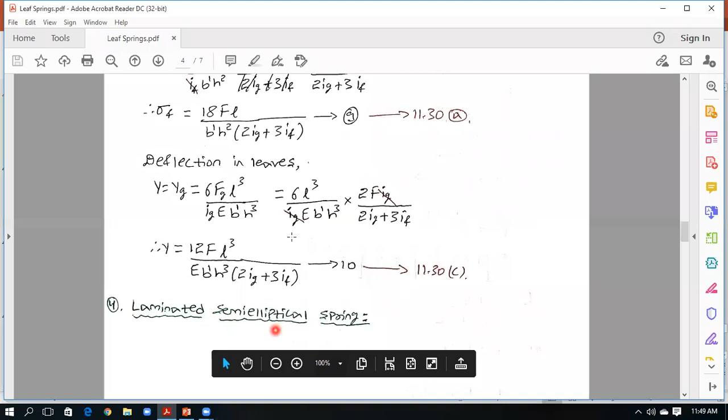In this, when the central bolt, which holds the various leaves together, is tightened, the full length leaf will bend back as shown in the dotted line. As you use the center bolt, that is U bolt shown in the previous figure, the various leaves will tighten and the full length leaf will bend back as shown in dotted, coming in contact with the graduated leaves.

And while doing this, when you use the U bolt and tighten it, an initial stress will be induced in the direction opposite to that of the normal loading. Whatever the normal loading is, the initial stress induced will be opposite in direction.

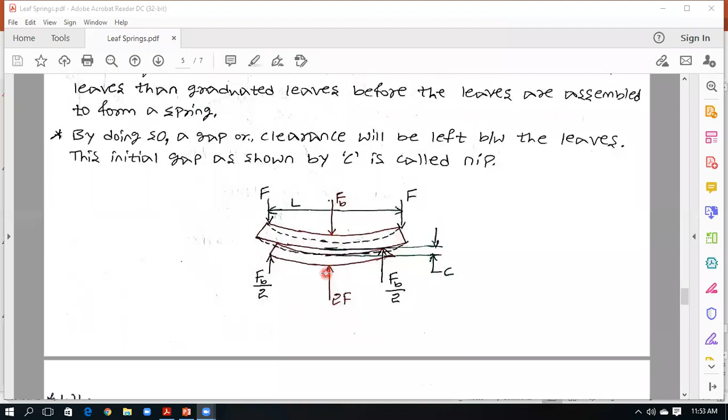When you take the difference in radii of curvature, that is called nipping, and the initial gap to be provided between the two leaves before assembly is given by the formula 11.32a, which you have seen. This is the formula used to calculate that. I hope you have understood this nip or nipping.

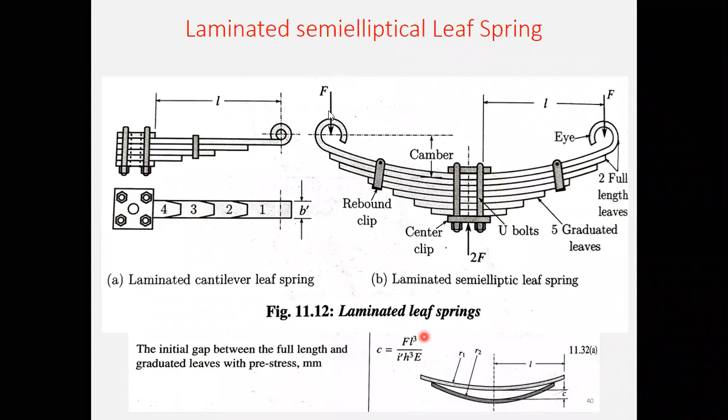As you have seen the different types of leaf spring, four different types, now we can take up problems on leaf spring.

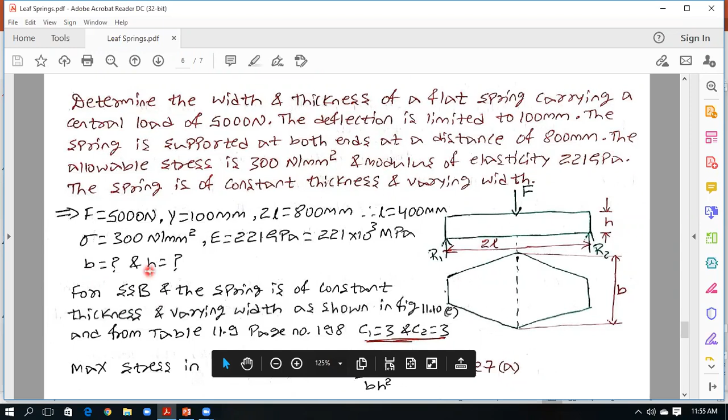The first problem is: determine the width and thickness. He has asked you to calculate the width B and thickness H of a flat spring carrying a central load. The central load is 5000 Newton, denoted by capital F. So F is equal to 5000 Newton.

The deflection is limited to 100 mm. The deflection Y is given as 100 mm. Note that down. The spring is supported at both ends.

This means it is nothing but a simply supported beam condition. You have to understand the statement: the spring is supported at both ends, meaning it is a simply supported beam, at a distance of 800 mm.

The allowable stress is 300 Newton per mm square, so Sigma is given as 300 Newton per mm square. And the modulus of elasticity is 221 gigapascal.

Stress as well as deflection is given in mm, and stress is in Newton per mm square. That's why I convert this gigapascal into megapascal: 221 into 10 raised to 3, remaining is 10 raised to 6, which gives megapascal.

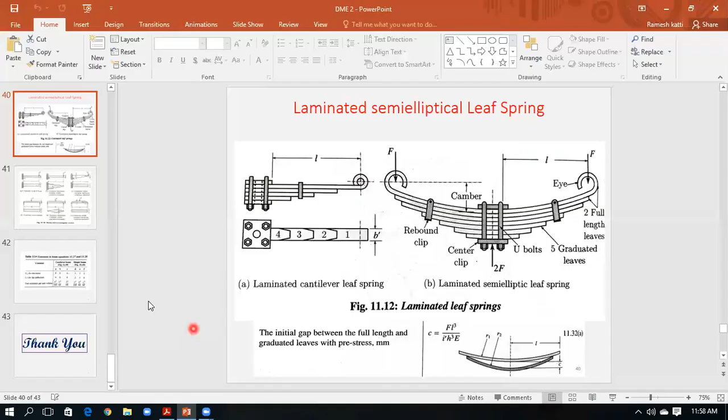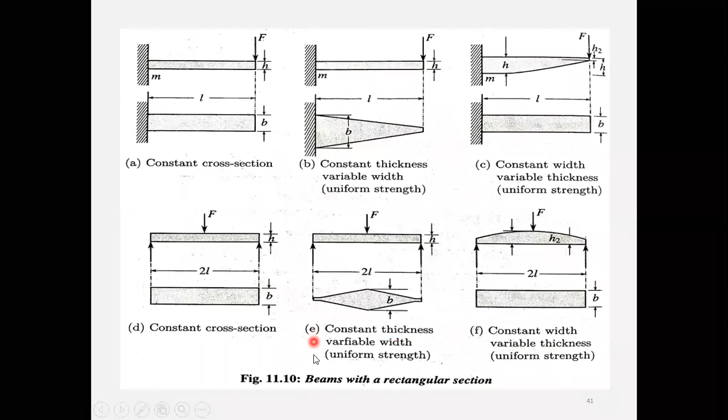Whereas in your given problem, it is simply supported. All the three D, E, F are simply supported. One more condition given is constant thickness and varying width. Not variable width, here the width is varying, meaning he has given condition E. From figure 11.10, you have to select condition E.

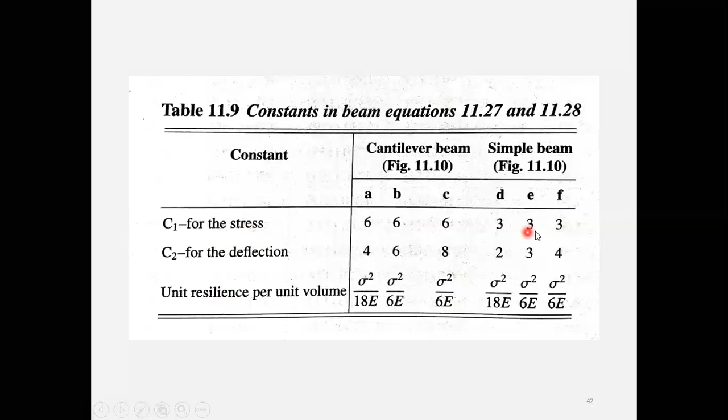In table number 11.9, condition E, simply supported, figure E you have to select. In that, he has given the value of C1 and C2. How much is the value of C1 and C2? C1 is 3, C2 is 3. This is how you need to take down the C1, C2 value.

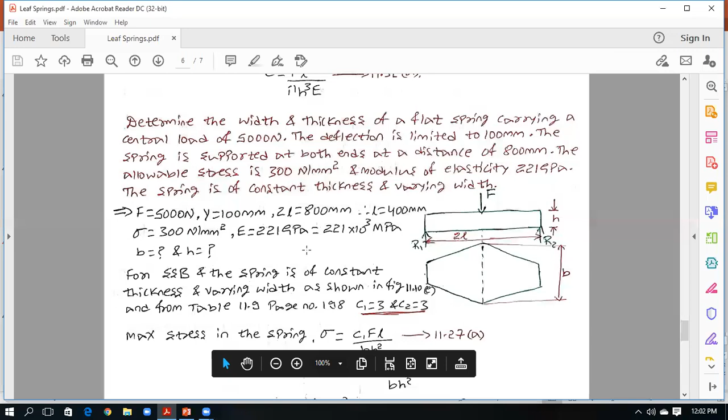Therefore, from table number 11.9, page number 198, you have selected figure 11.10E. From that, you get the value of C1 and C2. After getting C1, C2 value, next is to find out the maximum stress in the spring. Already you have derived this equation in the previous lecture. To find out the stress induced in the spring, you have to use equation 11.27a.

Referring to 11.27a, sigma is equal to C1 FL by BH square. Stress is given, C1 value is known as 3, F is also given, F is 5000. If you see this figure, it is not L, it is 2 times L. Don't get confused. For cantilever it is L, whereas for simply supported it is 2 times L.

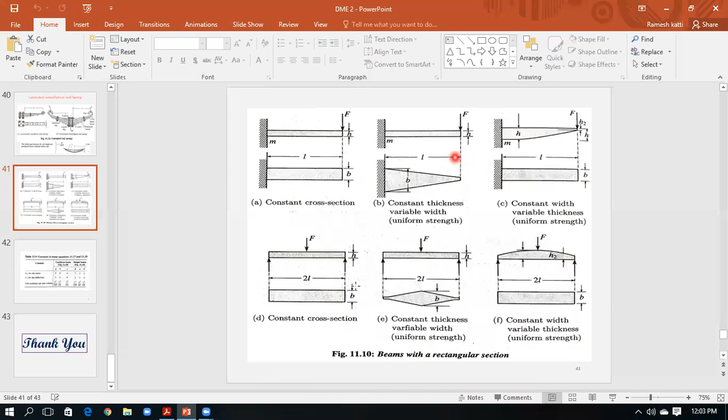From this, 2L is equal to 800, given as 800, therefore L is equal to 400. Substitute L is equal to 400. B and H, both the values you need to calculate, keep it like that only. Call this equation 1. In equation 1, 2 unknowns are there. If 2 unknowns are there, you will not get a solution.

But he has asked you to calculate B and H. What is the other way to calculate that? You just see the formula or given data. Given data is F is given. Now you can see that in equation 1, 2 unknowns are there. He has asked you to calculate B and H. See the given data, F is given, deflection is given.

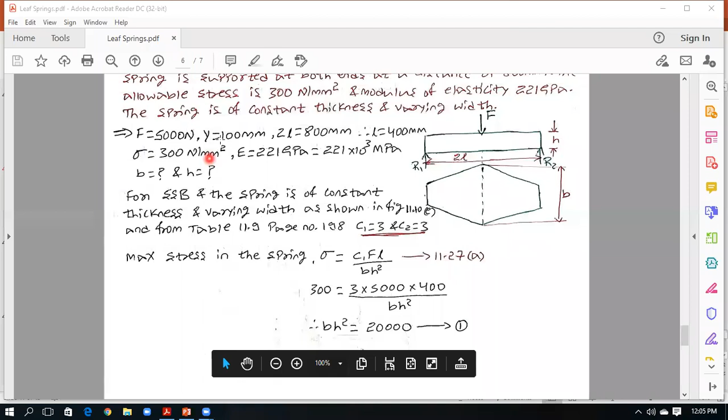If deflection is given, you can use the maximum deflection equation, which is in 11.27b. Use that equation, because Y is given. Use the maximum deflection equation, Y is equal to C2 FL cube by EBH cube.

In this case, Y is given, substitute C2 as 3, and L is 400. Substitute all the values. After substituting values, still BH cube remains, B is not given, H is not given, you need to calculate that. You will get equation 2.

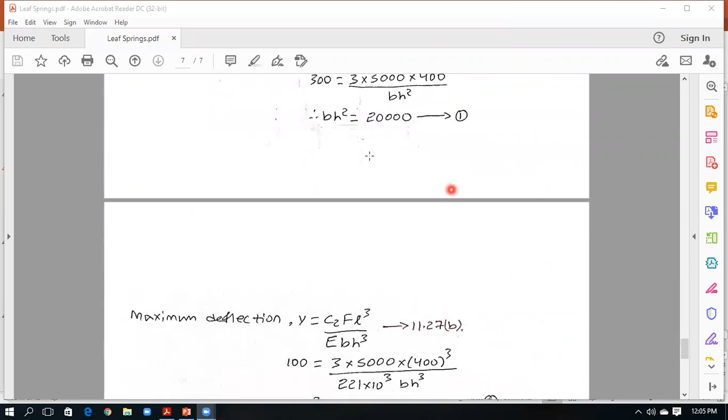Now solving equation 1 and 2, divide equation 2 by 1. Dividing that, B will get cancelled, H square and cube, remaining is H. In this only H will remain. From this you will get it as 2.172. Round it off to 2.5 mm. This is the H which you are going to obtain.

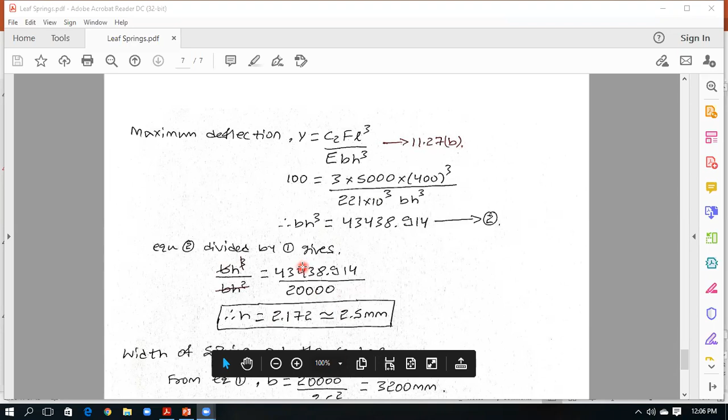After that, next you need to calculate B. Now substitute the value of H in equation 2 as well as equation 1. You will get 2 B values. In equation 1, if you substitute H is equal to 2.5, rounded off to 2.5, the B value will get as 3200 mm. If you substitute that in equation 2, the B value will get as 2780 mm. 2 B values are there.

You will be having confusion about which value you have to take. Always you will be designing for the worst condition. Instead of choosing the lower one, you have to go with the bigger value. Select the bigger value of these two. Therefore B will be 3200 mm, H is 2.5 mm. He has asked you to calculate B value as well as H value. You have calculated both the values.